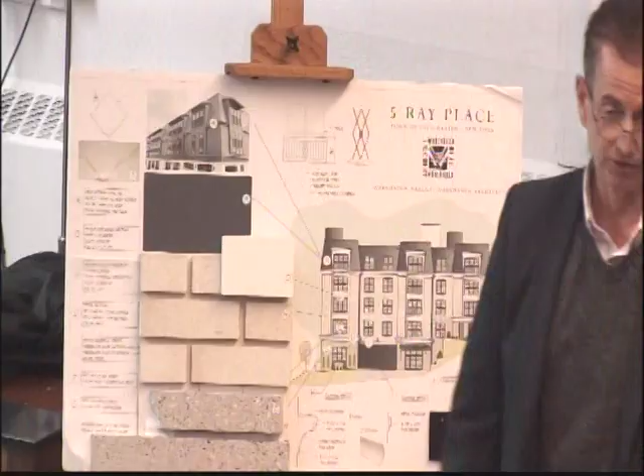this gray, which has a little bit of a stippled texture to it. And if you notice the gray slate sample that was just passed around, it's a similar color, and that also has a little bit of a texture. So aesthetic-wise, it would be very similar in terms of its appearance and the feel of the material itself.

Moving on, when we came in last time, we had proposed a couple of different vents, and you asked us to consider some alternatives. So this is the approved elevation that we have up here. This is the proposed elevation that we had last time, which has little circles you can see. We went through to demonstrate the difference, regardless of the vent size, and we're going to get to the new design of the vent, but this helps demonstrate a little bit of the difference from the approved.

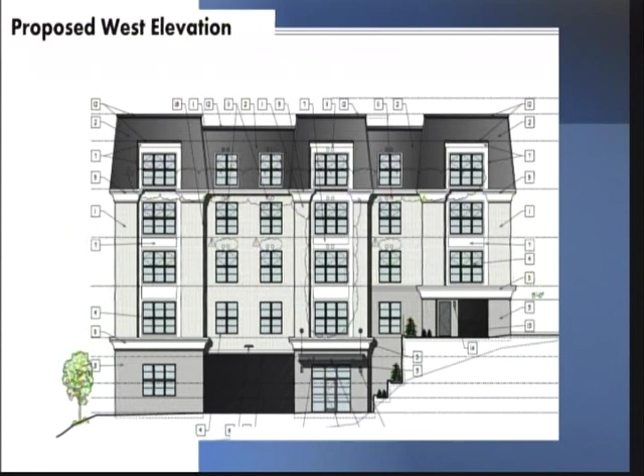I don't know if you can see my cursor, but you can see the size of those bulkheads that we've removed and the difference in the new proposed elevation, how it shows that those bulkheads are gone. The size of the building overall from the top of the highest bulkhead is about 9 feet lower in the new proposed elevations. You can see the difference here.

So one of the things that was mentioned to us was coming up with some sort of architectural design that would integrate more of a square, rectangular vent. You can see here it proposes to do just that. It would be color matched exactly. It would come out as a square vent. There are some additional architectural elements to hide it and obscure it a little bit.

But there are no remaining protrusions. There are no circles, which were what you were concerned about last time. It retains the lower bulkhead, of course, but it has a different design element. I think it's a very elegant design. Our architect really worked very hard, and I'll let him speak for himself on this, to come up with a design that worked within the framework of the actual HVAC units and responded to your comments.

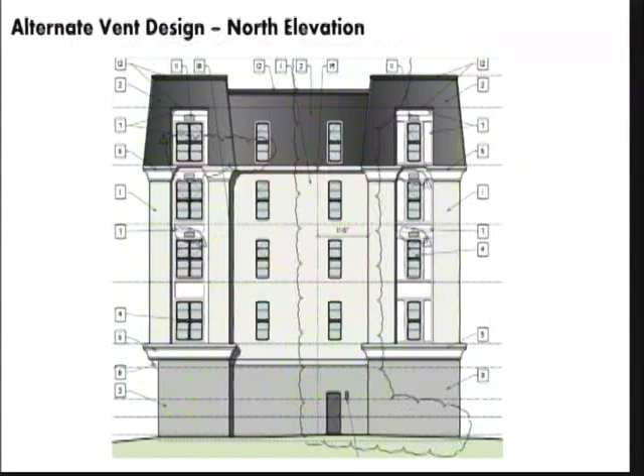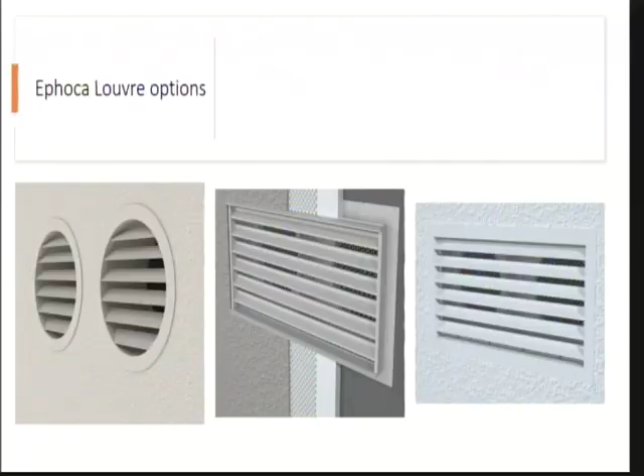I just want to point out where the vents exist in this drawing, because it may be hard to see from there, because it blends in. If you look at the image on the right and follow the bottom of the window all the way to the right, you'll see the two circles that are there. And like Jaime just pointed out, wherever the circular vents would be in our proposed design, they would blend in with the adjacent color. In the brick, it'll match the color of the brick. In the roofing, it'll be the color of the roofing, and in the AZEK, which is in certain parts of the building, it'll match the color of the AZEK.

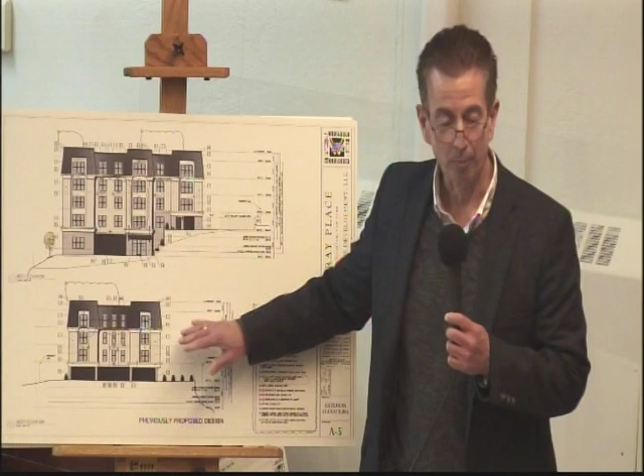So getting back to this, when we were here previously, we presented the circular vent design, and at that meeting, we were asked to go back and see what other options there are. This unit is installed right at the inside face of the exterior wall, and the unit is made to just do a direct connection through to the exterior wall.

So the options are either the circular vents that we initially presented last time that we were here, or, as Jaime showed up on the screen, the rectangular vent that actually has the two circular vents behind it. It's just that it's covered by a horizontal vent. And that vent is about 10 by maybe 16 inches long or thereabouts. And the circles are about 9 inches in diameter.

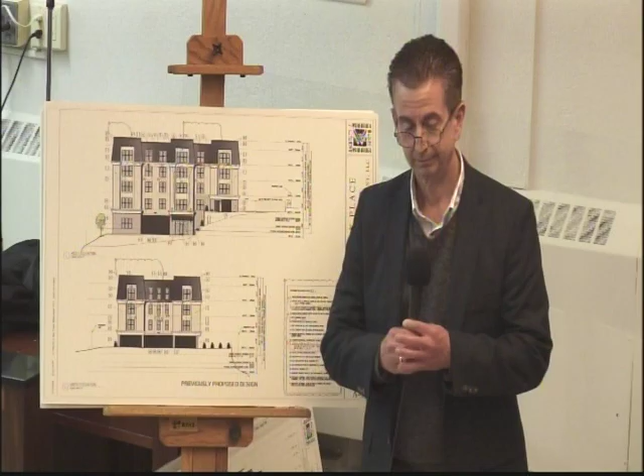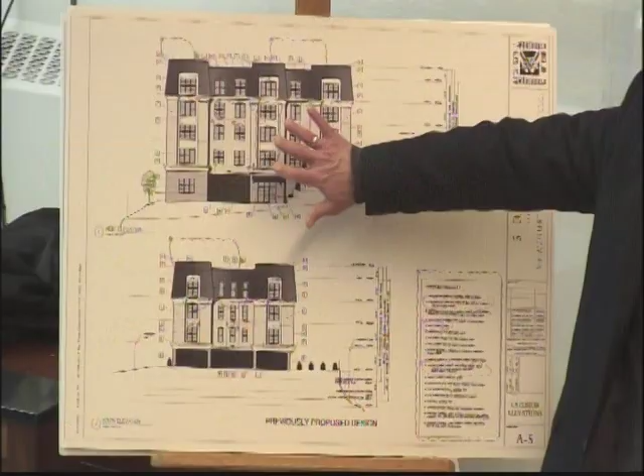And can we see maybe a close-up on your most recent rendering with the rectangular ones? Something that shows that. Or maybe on the board here you can point it out. The page on the easel right now is what was previously proposed, which are the circular vents.

Okay. And again, when we were designing their location, we tried to do them as inconspicuously as possible. And depending on the layout of where the bedrooms and where the living rooms are, we tried to locate them as much as possible not to face on 5-ray. So the corner units, if we had the option, we put it on the opposite elevation, so this way it's less obtrusive to 5-ray.

Okay. So that's like 10 by 16? Plus or minus, it might be a little bit longer. Each of those windows are probably closer to like 30 inches, so it's probably longer, 30, 36 inches. But again, behind that are the two circles. So what we did in the first concept that we presented here last time, we put them above the windows. Again, we favored the other elevations to have less of them on 5-ray.

With the rectangular option, and that's a great image right there up on the screen, the windows on the left, the existing design, you know, had the windows kind of stacked vertically within the AZEK panel. That's the way the design was originally.

What we did on the image on the right with the windows, where in the previously submitted scheme we had the two circles, we introduced AZEK above those windows where it currently was not before, and we put the louver there. So that's a little bit of a way that we try to incorporate the rectangular element in keeping with the AZEK theme of the windows that are right next to it.

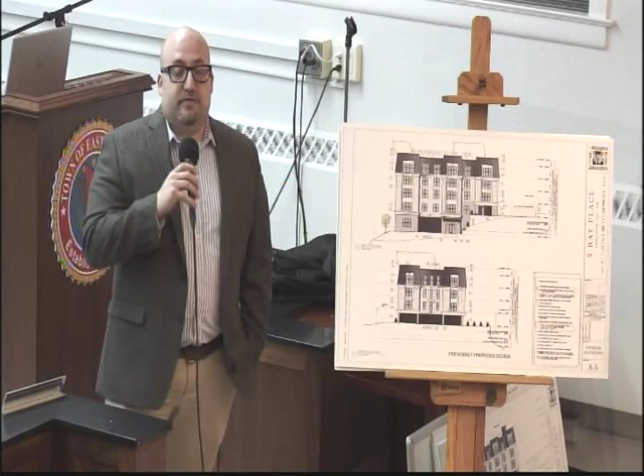Are there any other points, because I wasn't present for that meeting, that were made by the board that you addressed, or is this pretty much it, this and the roof? There was one other major point, that was the grills in front of the window. You know, we are still proposing to not put in those grills. You mean the railings? Apologies, railings. Yes, okay. We're still proposing to not put in those railings.

But we're open to some perspective from the board. We do not want to add all of those railings back. There are quite a few of them. But we're open to hearing what the board has to say about that. And we'd like to be able to walk away today and move on to the planning board. So, can you show the elevation that shows the railings? Yes.

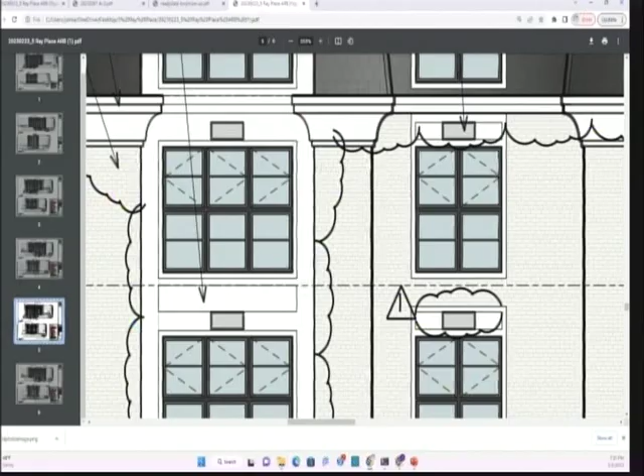If you just give me a moment, I'm going to try to turn off this double screen situation. It is making it hard to do this.

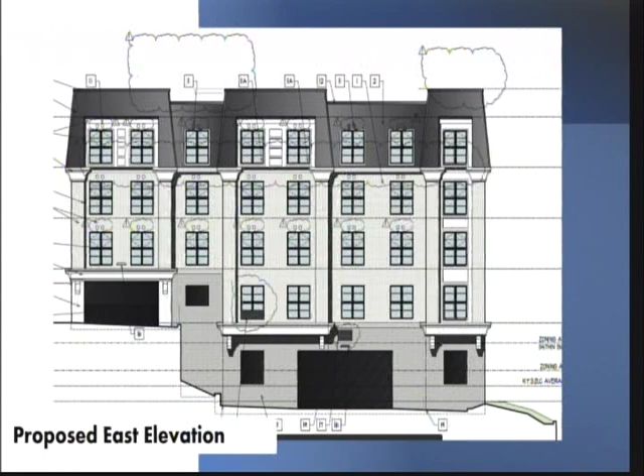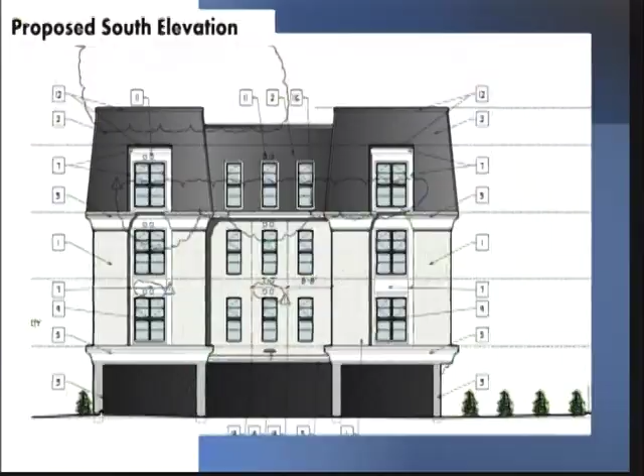This is the original east elevation. If I can, I'm going to pull up the west elevation, which is the one from Ray Place. Primarily on the first design, they were on the front elevation. So you can see there in that middle tower and the top floor. They were there for an aesthetic purpose, not a safety purpose or anything like that, right? Correct.

I would personally just like to offer my opinion of that again. I know we're eliminating railings, but as you see here, they're covering up the windows. The intent was to give it an appearance as if it was a balcony. They are not balconies, and upon reflection, if it's compared to what we're proposing now, again, in my opinion, it's a much cleaner look without the railings.

There's also another aspect of the railings that becomes slightly problematic. It has to do a little bit with the 4-inch sphere rule that I'm sure everyone's heard. For those to get installed, they would end up being probably more than 4 inches away from the line of the building. And there was a concern that we're inadvertently creating kind of a safety issue if we have that there and it's not a real balcony.

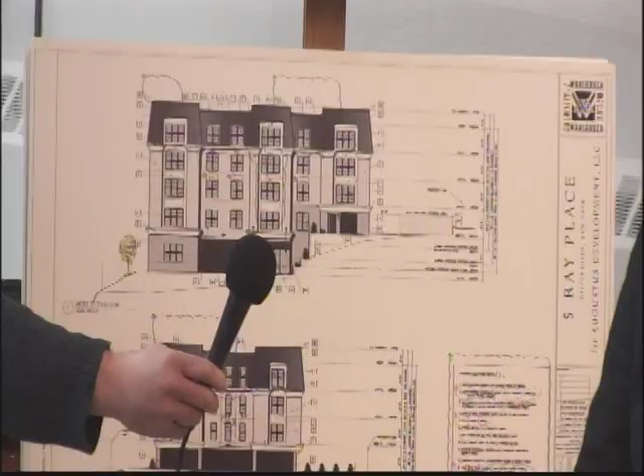John, I don't know if anyone heard that.

Do you want to open it up to the public hearing? Okay. So I'd like to make a motion to reopen application 22-47 for a public hearing. Second. All in favor? Aye. Is there anyone here from the audience that would like to ask some questions or make some comments regarding this application? Please come to the mic and give us your name and address.

Charles Galenic, Potter Place. I have several questions. On the material for the roof, what type of warranty came with the original material, both for the material itself and labor? Mr. Galenic, maybe you could ask all your questions, and then the applicant can answer them all at once. I think that would be more efficient. Happy to do that. And then, on the new slate product, what is the warranty, both on the material and on its labor?

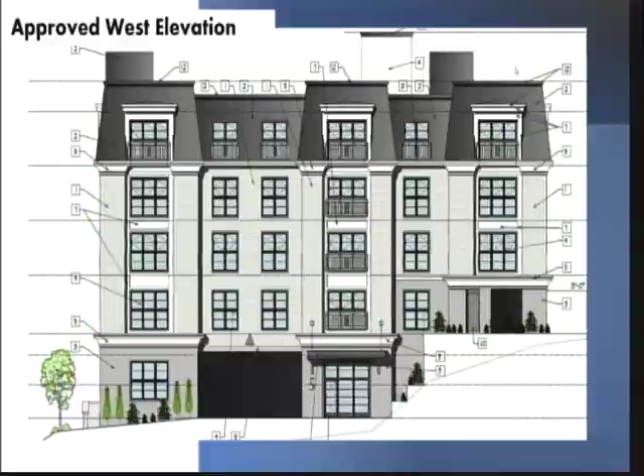I'm sorry, I was going to just say, you want to make sure you continue with the public hearing if there's anyone else. Oh, yeah. Is there anyone else? Please come and address us. Thank you, Margaret. Good evening. I'm Michael Fastiglione, 43 Woodruff Avenue.

A number of questions. Firstly, I wanted to clarify the comment that was made about the additional height that would be removed. Would that be a 9-foot lowering of the overall height? To me, that's a positive move. The lower that building becomes, the better it is. One of our biggest problems was that from Route 22, the building would appear to be something like an 8-story building. So now we're down to 7, so we're closer.

The next question I have is concerning the recommendation to put electric cable and telephone wires overground. Does that mean that we'll have to add telephone poles, or will there be cable lines? How will those wires be attached to the building? And the final question I have is, the construction of the mansard slate, will it be put on some sort of a grid and then placed in 12-foot pieces, or how will it be installed? It's certainly not going to be single individual pieces of slate. Will it be a grid of some sort, and will the trim work on the grid match the slate? Those are my questions. Thank you.

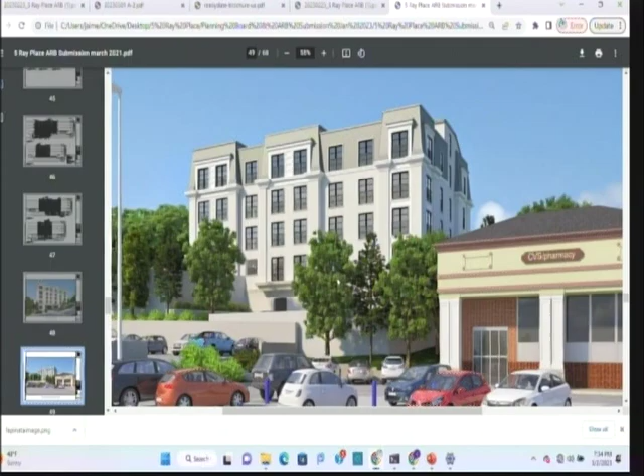Thank you. One more. Pat Gabriel, 24 Ray Place. So that picture that was just shown there, you don't think that building is very imposing from Route 22? You don't think that building looks very high compared to CVS and stuff? In my personal opinion, no, I don't. Okay, so I was curious what everybody thought. To me, it looked very imposing. Okay. All righty.

Anyone else? Okay. Board members, do we have a motion? I'd like to make a motion to close the public hearing for application 2247. Second? All in favor? Aye. Okay. Silvio, did you speak about the railings? I'm not sure if there was something. My opinion? Yes, please.

My opinion, the roof is a great improvement. The only thing I would ask about the roof is the hips, how the hips and the caps are, what is that material, what's the detail? Secondly, I prefer the rectangular vents to the round ones. And I also prefer not adding the AZEK over those certain windows to add a vent. I think having the vent in the brick, like you originally had, but rectangular, would be nicer. And I do still like the railings. That's my opinion. I didn't hear the very last piece. I still like the railings. I prefer the railings on the building.

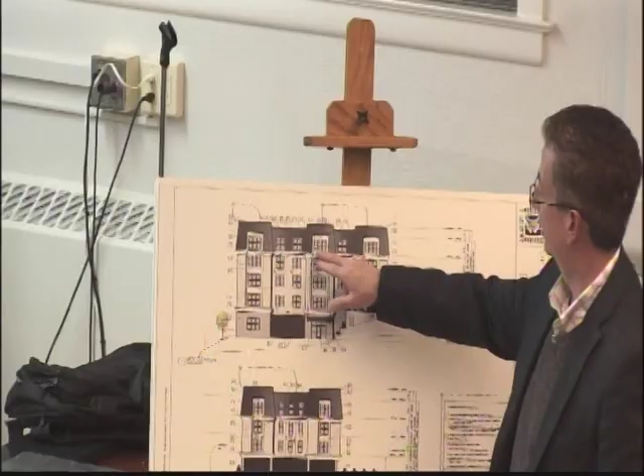But I think the windows are fixed where the railing is, right? The lower piece of window is fixed where the railing is, so you're opening only above it? I believe the intent, and correct me if I'm wrong, the windows without the railings are all operational. The windows with the railings are fixed. Is that correct? Yeah, it's hard to see in this image, but the way the window's designed, it looks like it's a double hung, but operationally, the bottom half is fixed, and the upper half acts like a casement window. Okay.

The railings where they were before line up primarily with where the fixed panel portion of the window would be. Okay, so it's safe. Yeah, yeah. I'm just answering. Okay. Yeah, I mean, the other windows, they're actually real double-hung windows, and you can open the lower portion. No, that's an accurate statement, what you just said, yeah. Right, okay, the bottom part is fixed. Okay.

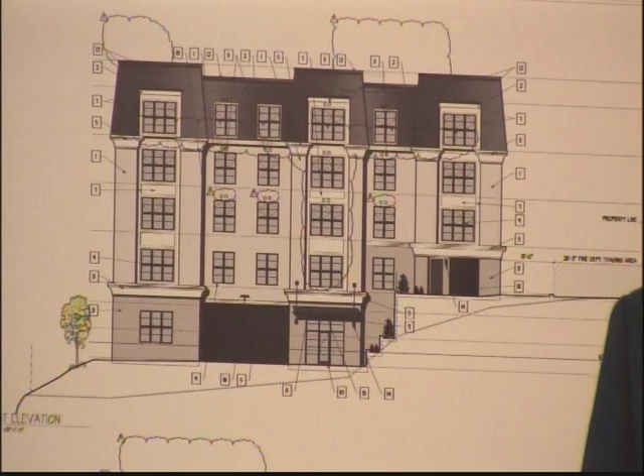All righty, so then on the railings, we agree that they should remain, and if at all, they would be eliminated from the center portion? What Jennifer suggested, are you all okay with that? Just keeping it on the top? Why can't they do the center? Well, I don't know. I thought it would look nice with the center. Accentuates the entranceway. It would really look nice. Okay. All right, never mind on that part.

So we would like you to keep the railings. And as far as the roof, we all agree, yes. We really do like the new slate that's proposed and are very happy with that. 100% better. So you're going to refer it to the planning board with a recommendation to approve the natural slate roof, rectangular vents set in the natural background, but to keep the railings as previously proposed. Correct.

So, with those points in mind, I'd like to make a motion to send application 22-47, 5 Ray Place along to the planning board with the recommendation for approval with those options selected. Second. All in favor? Aye. All righty, thank you. Thank you very much. Okay.

So we are proposing an aluminum motorized pergola over our existing patio for additional seating. We initially were planning to extend our second floor. That turned out not to work in our favor with the amount of seats requiring more bathrooms. So this is the route that we decided to go. We have two other restaurants in Pleasantville, New York, Wood and Fire and Southern Table. They both are using this pergola, approved and operational. It's not changing anything to our existing interior or exterior portions of the building. It's going to go right over our current patio.

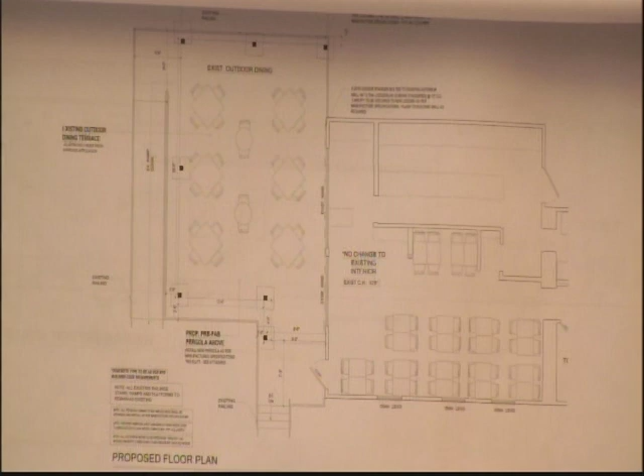I can't connect to your computer, to the screen, but I do have renderings of what they look like. I don't know if I could show them to you. I don't mean off of your computer, that would be difficult, but if you put it on the easel, something that's printed out, some blueprints, but otherwise, no. Do you have an HDMI connection on there? We don't. Oh, that's the reason. Okay. If I had known I was doing this, I would have planned a little bit better.

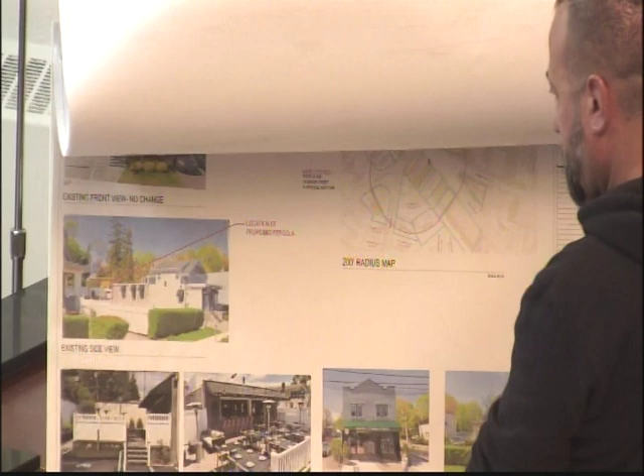Is it being enclosed, or just the top opens up and closes? So it's motorized. Louvers on the top, hard plastic clear sides that go up and down. So it's going to extend our seating for the wintertime. We have an occupancy problem. We only have 55 seats inside. Knock on wood, we're busy, but come the wintertime, we lose that seating, which does affect us financially

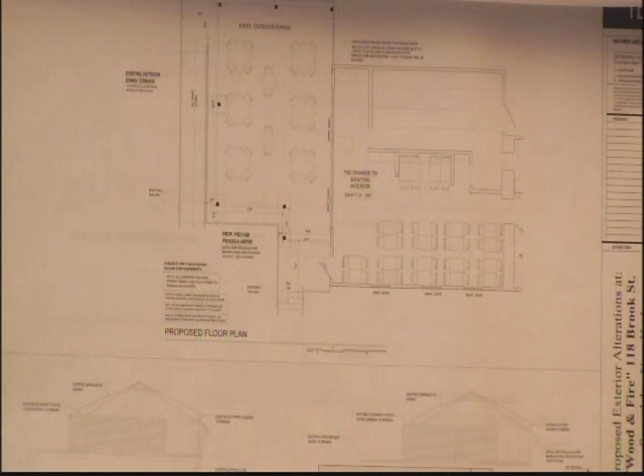because we have limited seats. During COVID, the town was great. They made it easier to get a tent and put it up. Now that COVID is going away, getting a tent, we have to go through the same process of what we're doing right here. So we're making the investments in all our stores to put these pergolas. It's a big investment, about $250,000, fully heated, electric heaters mounted in the ceiling, fans, and again, the retractable sides.

The roof doesn't open 100%. There's just louvers, so they go 180 degrees. So it also helps us when it rains. If rain's coming, bad weather in the summertime, we could shut the roof, roll the sides down, leave the sides up, and it extends our seating. It helps us financially. And what color is the structure made of? It's a charcoal aluminum, so it fits right in with our building.

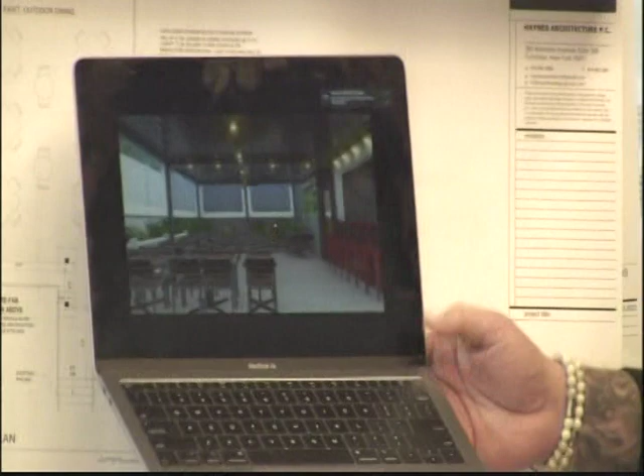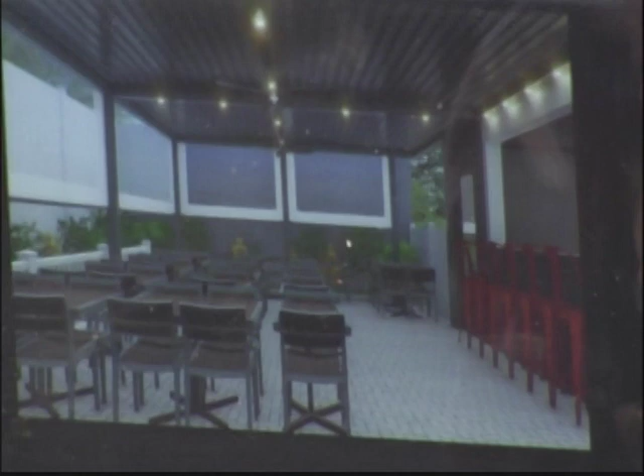And the lighting is in the cross beams and the side beams? It also has its own built-in gutter system. So, just to give you an idea, that's what it will look like with the sides up. With the sides down, they're clear, with a black trim around it just for a little decor. As you can see, the lights do go through the cross beams. In those cross beams as well are built-in gutter systems. So they'll be tied into our drains, and coming down the columns all around is where the spigots come out for the gutters.

So it's well built. We're using it in our two stores right now in Pleasantville, fully functioning. How long have they been going for? In Pleasantville, it's two, Southern Table and Wood and Fire. Both got approved last November. They were operational by January for Super Bowl Sunday. I had a wedding in there, completely functioning. So we're going on our second winter at the two stores in Pleasantville.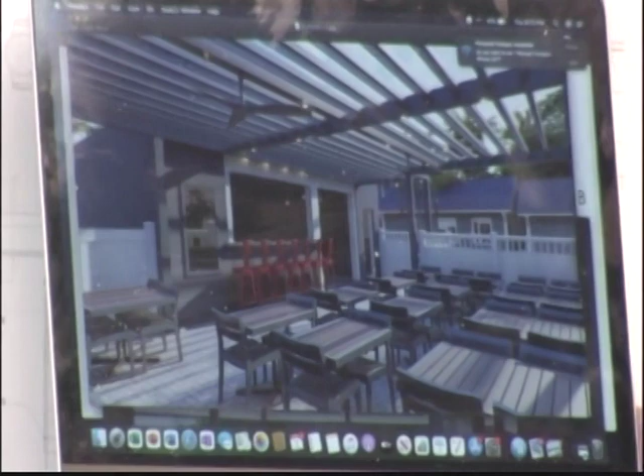And so the gutters go right into the plants, right? I'm just joking. No, the gutters will tie into our drainage system that we already currently have. So on those columns, there's a spigot at the bottom. It is installed with a slight pitch for the water runoff. The louvers have a built-in J channel, which was a big thing for us.

A concern was, in the summertime, it could be beautiful, and within 5 minutes, we got rain. I look at my radar, the rain's coming, it pours, and then it's nice 2 minutes later. When the roof is closed, the water's on top. When those louvers open, it has a built-in J channel, so people aren't getting soaked. Because that's a big problem for us in the summertime. A quick rainstorm out of nowhere, and people are running inside with their food and their plates, causes mass confusion in the restaurant.

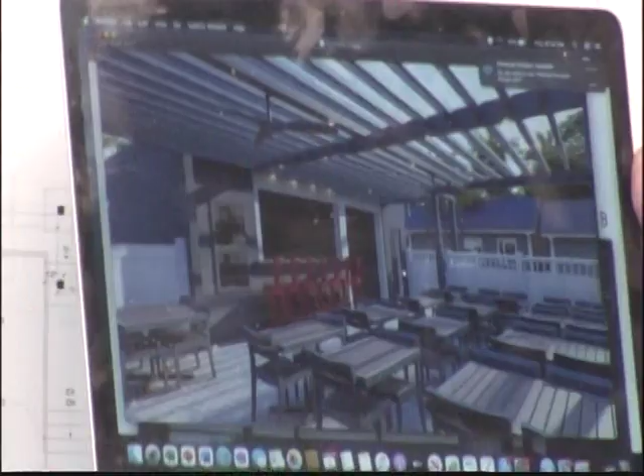Okay. This was approved by the zoning board at the end of '22 by all parties. That's right, pretty much it. All right, so we get it. I'm just going to make a motion to open up application 22-34 to the public. A second? Second. All in favor? Aye. Okay, anybody here that would like to speak regarding this application? Now is your chance. Okay, that being the case, I would like to close the public hearing on application 22-34. Have a second? Second. All in favor? Aye. Okay, the public hearing is closed on this application.

And it's a pretty cool application, and got to see it when it was raining also. Yeah, Wykagyl Country Club has it as well. We're the first restaurant in Westchester. We saw it from Wykagyl Country Club. It really works great, other than the two coldest days of the year that we had, where it was 2 degrees on a Friday and Saturday a couple of weeks ago. We're able to seat it fully in the wintertime. Okay. So it's a huge help for us financially.

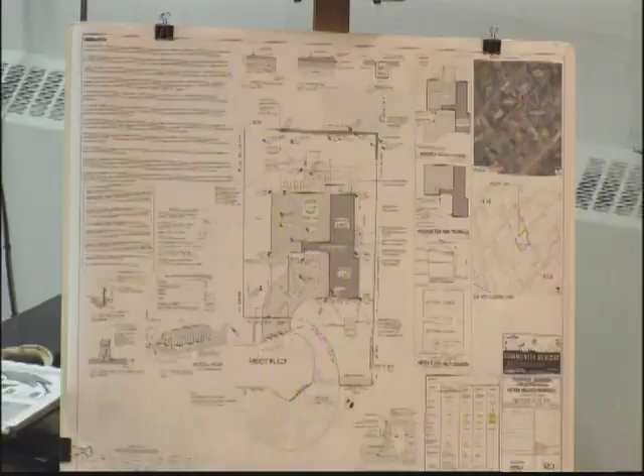to suit their needs. A couple months ago, we did receive a zoning variance for the garage addition that you see on the right-hand corner side of the house, with respect to the front yard setback. It sort of encroaches into that front yard. But this home is on a dead-end street, a cul-de-sac, so there's no home to the right, but there is a house to the left, which I believe is 3 Nancy Place.

So just to switch over to the elevations and go through the overall idea of the additions and the aesthetics. The house ultimately will pretty much read as a Tudor style. The applicants are pretty specific on the materials, colors and aesthetics of the home, but there are some transitional elements going on as well. Of the existing home, really only the left side remains somewhat intact. The existing garage will be converted to a playroom, the garage door will be removed, and there'll be 2 windows that line up with each other. Right now it's sort of offset.

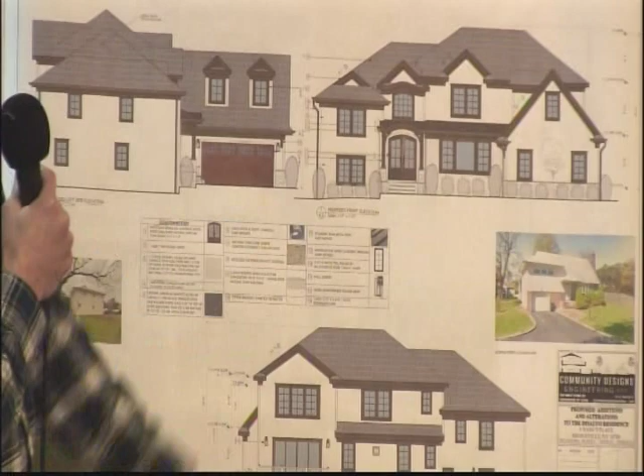Then next to that is a new portico and almost 2-story entryway. And mostly to the right is where we have the 2-story addition and the 1.5-story garage that protrudes, as you can see here on the left side elevation, where the driveway arches in from the street into the new 2-car garage.

So just to go over the materials, sort of differently than what exists today, it's going to be a stucco finish. It's pretty much an off-white color. All of the trim and everything that you see is a dark bronze. The windows are Andersen 400 series windows in a dark bronze finish, and that's basically from the manufacturer. The standing seam metal roof is a little bit off from that dark bronze. I think it's an aged bronze color, so it's very similar, but just gives a little bit different touch so that everything doesn't completely match.

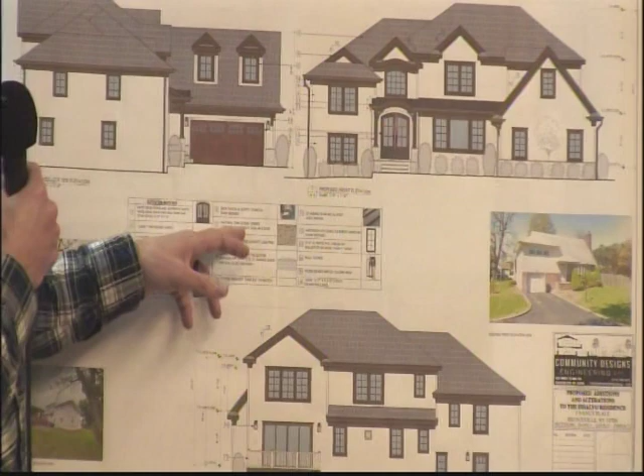The stone is a real thin stone veneer. The name of the stone is Concord, but we're going to do an overgrout on it so that it gives it more of that Tudor and rustic sort of feel to the house. The roof is an asphalt shingle roof, lifetime roof, their Harvest collection, which is Appalachian Sky, so it has some different colors and variations to it. You could pass that around. That again goes with the whole look and vibe of the house that we're trying to create.

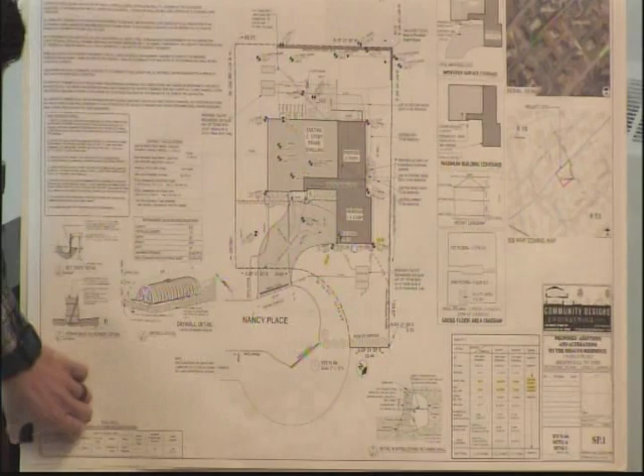Streetscape. Again, with this being on a cul-de-sac, there's not much going on other than the house to the left. Most of the homes in that area are much larger than what currently exists, so the home will fit into that dead-end area as far as size and overall appearance. The new condensers are on the right-hand side of that addition as well.

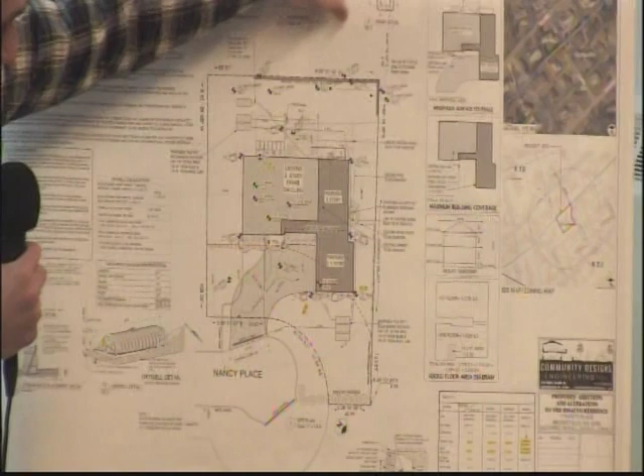Thank you for twisting the garage, so you don't see a garage door. This has much more curb appeal. Yeah. Really, the site itself, that's why we went the variance route, because it led to that whole setup, and that was the most ideal way. It looks really good. Thoughtful approach. Thank you. And the materials are quite nice also. We even like the lights. The sconces are nice. The entry doors are beautiful. Really, really nice. And they really look like they fit the home.

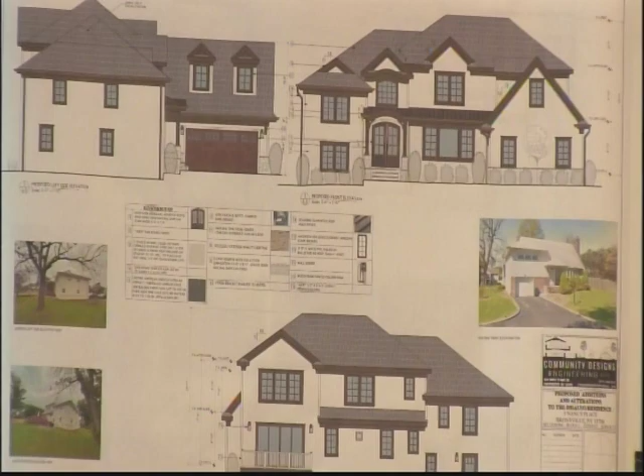So, I'm just going to go through the due process. I'd like to make a motion to open up application number 22-48 to the public. Second. All in favor? Aye. Anybody here that would like to speak regarding this application? Now is your chance. Don't all rush at the same time. So that being the case, I'd like to make a motion to close the public hearing on application 22-48. Second. All in favor, so the public hearing is now closed. Okay.

Any further comments from the board members regarding this application? I think it's a really, really nice home. Beautiful materials. Just a good package. Thank you. Yeah, very nice design. Very thoughtful. Good overall presentation. The owners were very hands-on as well with picking everything out, so it sometimes makes it easier. As they should. It's obvious. This is specific to their likes and wants. Beautiful home on the outside, and the layout on the inside looks very functional and certainly somewhere I would be happy to come home to every evening. Do we have any final comments from the board?

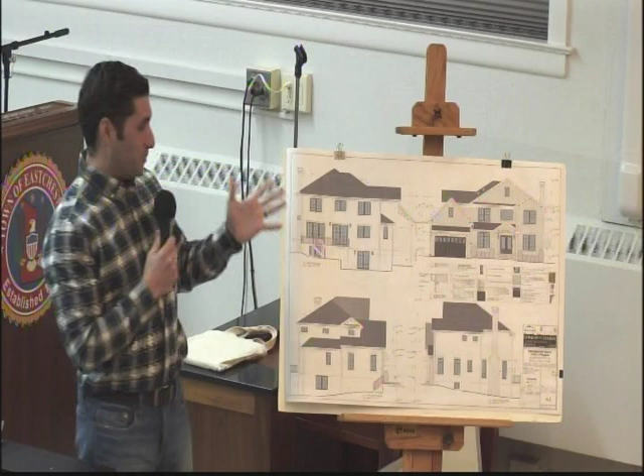Pretty much what happened here is it was originally approved, and the builder sold the property to a new homeowner that is specifically going to build the house for themselves, so they didn't really want what was previously proposed. They have specific intentions on the aesthetics and all that. So the most important thing is really the site. Overall, everything on the site, the landscape plan, the coverage and all that, stays exactly the same. The footprint of the house stays the same. The only thing that changed is the aesthetics.

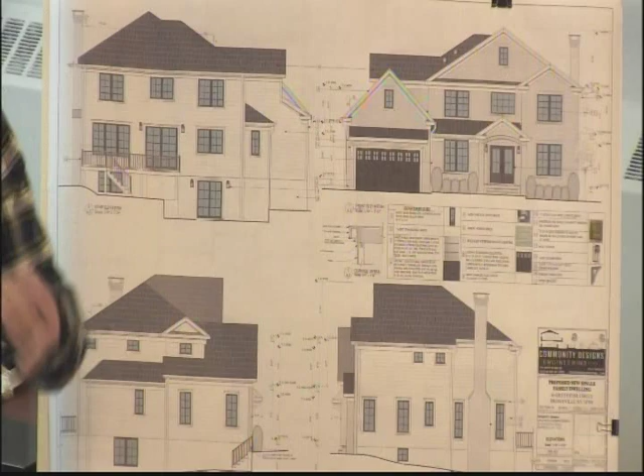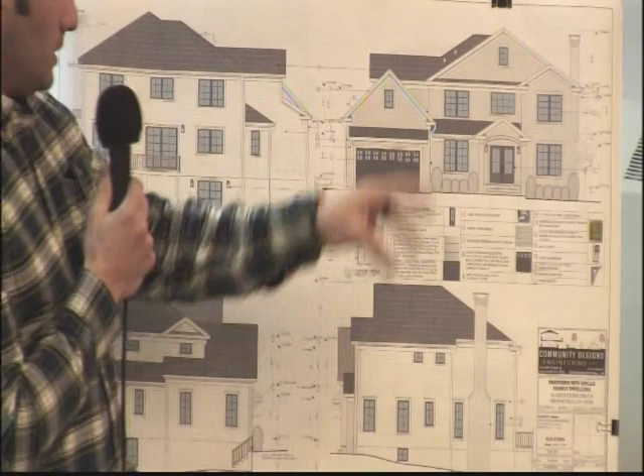Although the massing of the home is very much similar to what was approved, again, looking at it as a new home, basically there was a front porch. All right, let's get off of the existing home. So basically, this new home will have a white brick veneer on the front. The front entry will be more signified with this arched front portico, but it doesn't really extend much out. It's only about a 1.5 foot extension towards the front, but it has a vaulted ceiling to signify that two-story entryway.

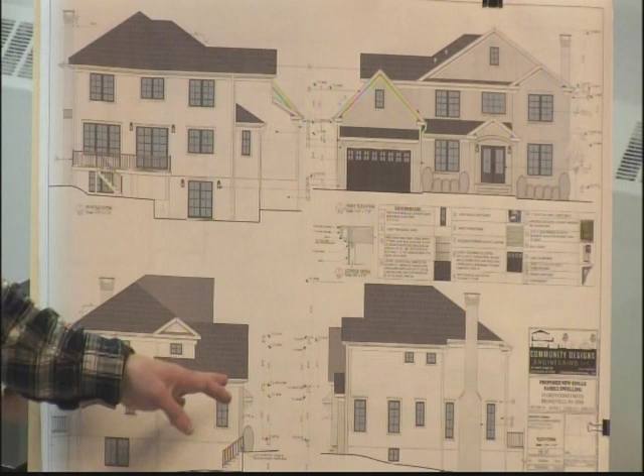The windows are Andersen black windows. They're casement windows. Mostly all of the front is that same style brick. The standing seam metal roof is a charcoal color, and the asphalt shingle roof is charcoal as well. Once we go to the sides, we wrapped the brick so that you don't just see that 4-inch facing. We wrapped the brick along the sides about 1 foot, 1.5 foot, and the rest of the sides are white Hardie plank lap siding. It's 8-inch with 7-inch exposure.

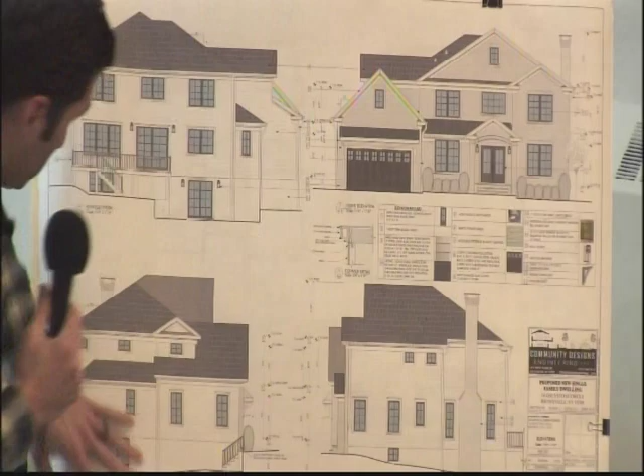The chimney will be the same brick as the front of the house, and because of the slope of the property, there's a deck on the back with white AZEK, Trex decking, and a black railing. If there's anything, just the streetscape really quick. This is in a dead-end cul-de-sac. The house to the left is a brick, somewhat center hall colonial home, and to the right is your typical ranch-style home in the area, and this will sit in the middle of those two.

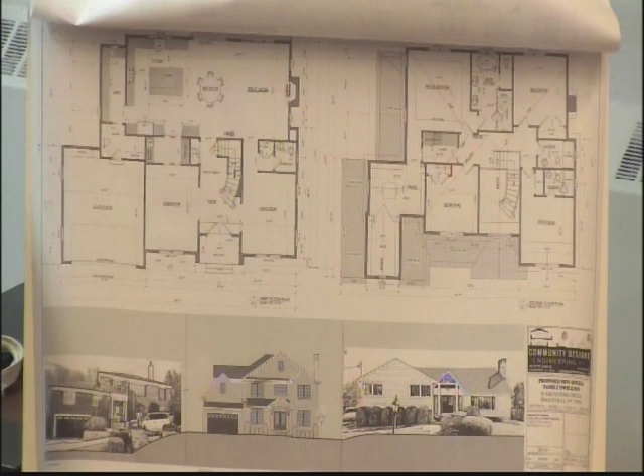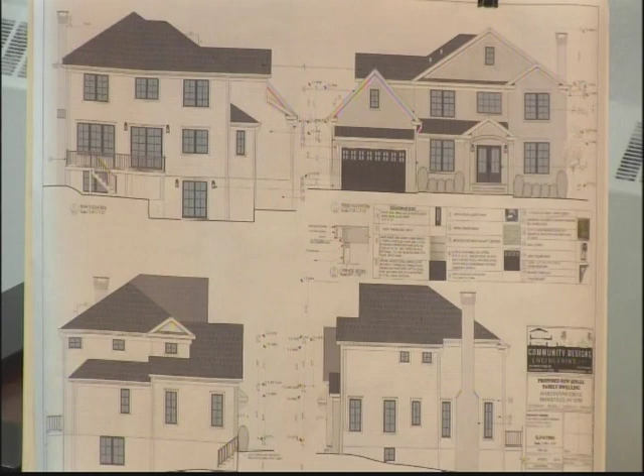Okay, I'm going to keep the dream alive. I'd like to make a motion to open application 23-10, located at 16 Greystone Circle, to the public. Second. All in favor? Aye. Okay, the public hearing is now open. We have one gentleman who looks like he's heading for the doors. So that being the case, I would like to make a motion to close application 23-10. Second. All in favor? Aye. Okay, so the public hearing on this application is now closed.

I have a question about the brick. Sure. It looks like it's a tumbled brick, it's rounded. Is that what you're going to use? No, it shouldn't really be. In this illustration, it looks kind of tumbled, like hand molded. It has rounded edges. It's not a real square brick. What do you intend on using, a square brick or a round tumbled one? More of a square brick.

Okay. Maybe it's the grout, because sometimes with the grout... No, you can tell those bricks are rounded. That grout also has too dark a color to it. It wouldn't be that; you would need a very white, engineered, square, almost sharp-edged brick, like painted white brick. The sharper brick would be a better choice. Yes.

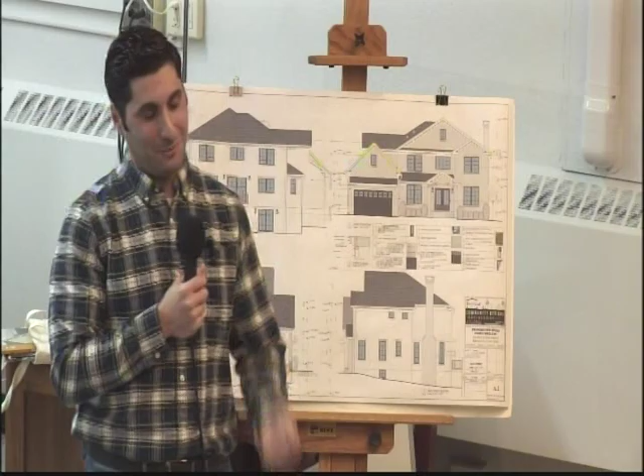Now, the new homeowners, he doesn't have anything to do with, not that it matters. Has he retained the builder to build the home? No, the new owners have a new builder, a local person as well. Okay. I know the new owners personally as well, so that's why I ended up staying with them. Made it easy that way. Good. You're keeping both sides of the equation going.

Okay. Sylvia, any comments on your end? No, I like it. Looks good. So, I would like to make a motion to move this application along. Application number 23-10, located at 16 Greystone Circle. The one caveat, just to reconfirm that the brick is not per the attachment that you handed out, more so per the design and more of an engineered sharp edge brick. Anything else that we didn't address? No, I think we're good.

Well, before you do that, I'd just like to say something. You know, Margaret, we found out, actually Jennifer told me on Monday, that after 17 years, right, Margaret? 18 and a half. I need credit for a year and a half. After 18 and a half years of penal servitude, Margaret Uhle, our Director of Planning, is retiring.